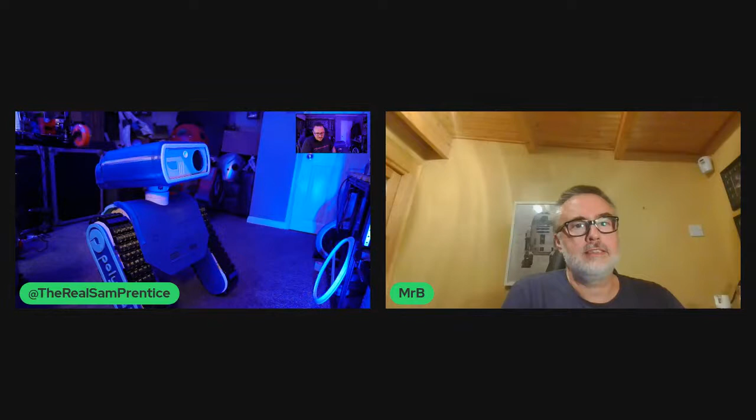But when we first set out to make this droid, and we were talking about this, that head tilt, just that little bit of head tilt. Now I've got this dialed right back at the moment because I was worried that it was going to start smashing around. What you'll find is certainly with some of the cheaper radios - I'm not using a cheap radio - but some of the cheaper radios will smash the head up and down. After 3 days worth of printing on this particular head, I really didn't want that to start causing an issue. But as I say, there's a couple of things here that don't work yet, but they certainly will by the end.

There's a little - what do you want to describe this as? A little holo, I guess? Yeah, a little holo projector. But it kind of goes in and out, doesn't it? It's on a single print screw mechanism, I think. And then also we have an aerial, a bit like the original D-O, where this is going to twitch and move around as well. So that is kind of where we're at with that at the moment.

So I'm dead chuffed, I mean we're nearly there. Let's try and not crash it into myself. I think the batteries are getting really low in this as well because we've been working on this pretty much all day, trying to get things out.

Just to give you a perspective there, that's D-O down there on the floor. Yeah, and I mean what's the size difference on this? Did you scale this up at any point? No, I didn't. I started with the tracks and then scaled it proportionately to the tracks. So I can't quite remember, but I think it's around about just over 4 times larger than the original D-O. I think it comes in at just under 3 foot, about 2.5 to 3 foot, I think.

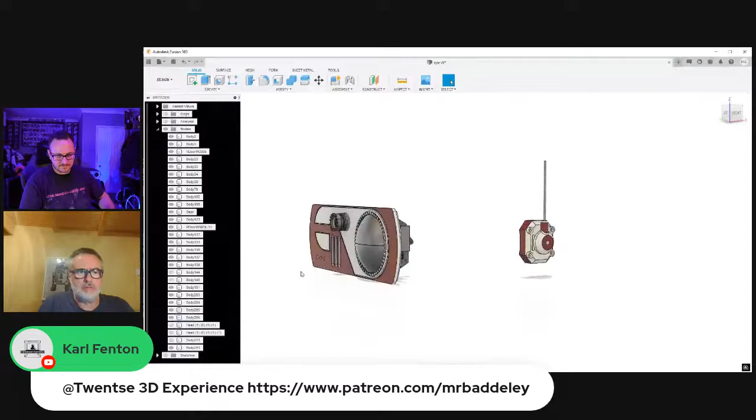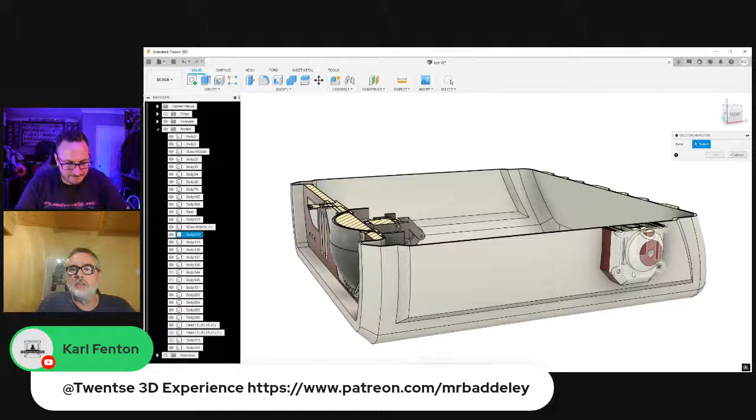So behind the scenes, this is what's going on with those eyelids. It's quite interesting because I know this was a real quick design job so that you could print and get it ready for the TCT show. So originally, let's see if I can pull up a sectional analysis here. The bit you're talking about, Sam, is the eyelid actually crashes into the actual head frame here.

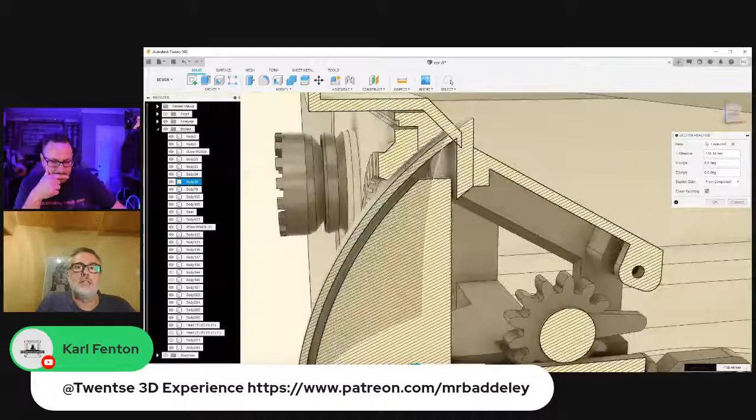It does. What I've done is I've shaved part of that back because you sort of had to. On the files I'm doing now, I've actually trimmed this headpiece back so that it won't do that. But I think what you've had to do is manually cut that back or Dremel that back so that you don't have any rubbing on there. I think that's the one, mate, that is the one. But like I say, it works like a dream.

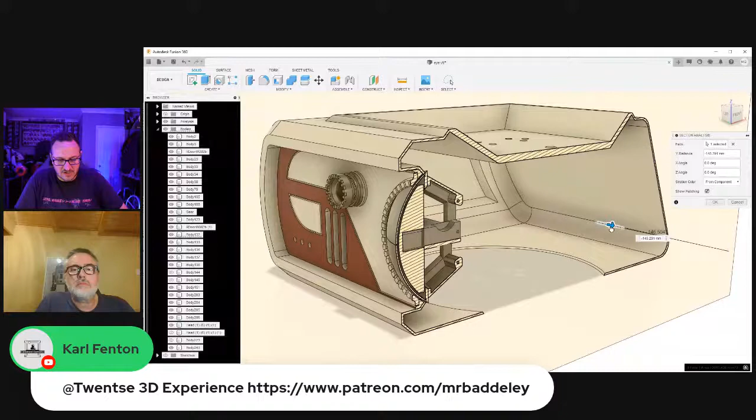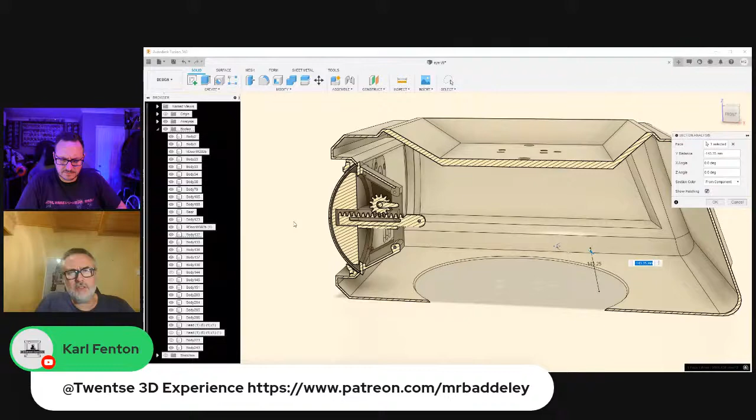So this robot, as we move forward, we're potentially going to be using or suggesting the Cytron controllers, which I think go up to 32 amp, don't they? Is it 40? Is it 32 or 40 amp? I know they're quite chunky, one or the other, but it's quite nice - it's quite beefy, from 7 volts up to 30 or 40, as you say.

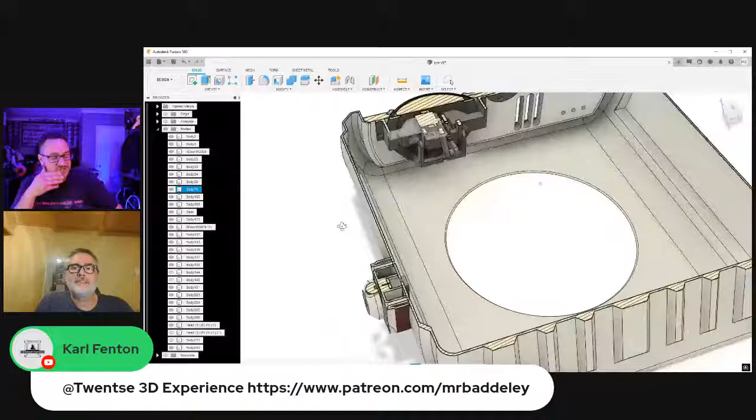Now I'm running this at 12 volt using a tracer battery, a single tracer battery, which is flat at the moment, which is why we're getting the twitches. On my controller there's an add-on you can get to also measure the battery voltage, which is something I might invest in if I'm taking this out and about, just to keep an eye on that.

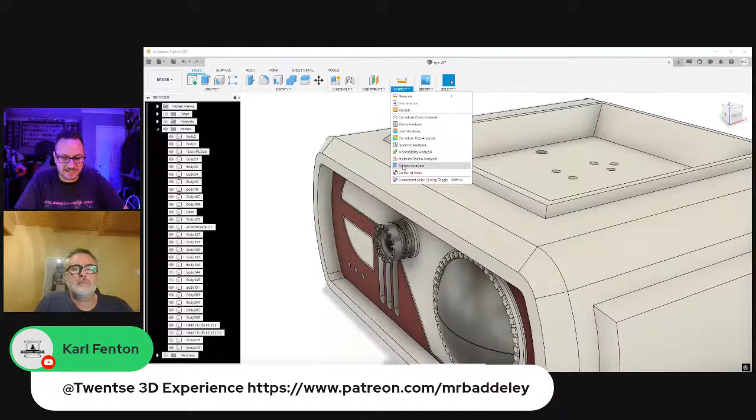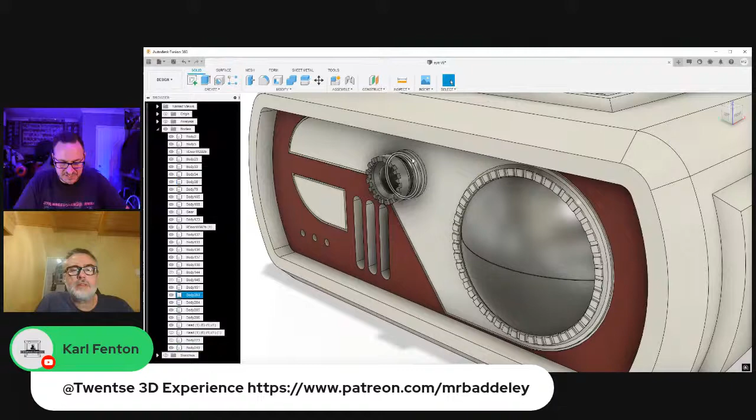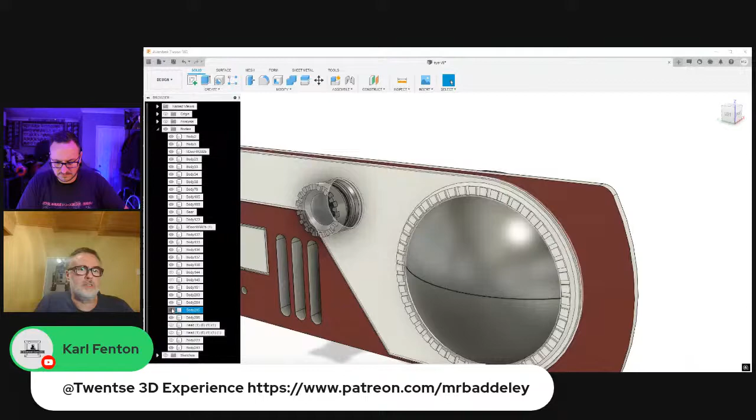And that part on the front, that was another mission as well. No, not this bit - the plate behind it. For some reason I had to scale that down ever so slightly. The plate that goes right on the front where it covers the eye - that's fine now, that's on there. That was this piece here, wasn't it? That's it, yeah, that's the one.

So I've had not many, but one or two comments back about the track system. I thought it might be amusing to speak about that quickly. Now, I love the design - I don't care if it isn't tank track ready. When I was looking at it, it's kind of like one of those things where wouldn't it be cool if it actually went down flat and drove like a tank, and then the head came forward, almost like a transformer, changed into something else. But I really like the fact that it's on its point.

And it works and drives incredibly well. I haven't had it tip over, and I gave it the beans going up and down my driveway, really thrashed it to death to try and get it to do something - because part of testing a robot no one's ever built before is how easy is it going to fall over, is it going to be like a Robin Reliant and literally tip over. You can wheel spin it, you can direct stop it, and it will give a little bit of undulation. But now the head's on it, I don't want to be smashing it around too quickly, which is why we've scaled back the whole movement of the head now.

What was the point basically when you went back to this design? What was the idea of that? Well, I'll cover the tracks first of all, because the original - as you know, it's some concept art - I love the idea of the tracks going right up to the shoulders.